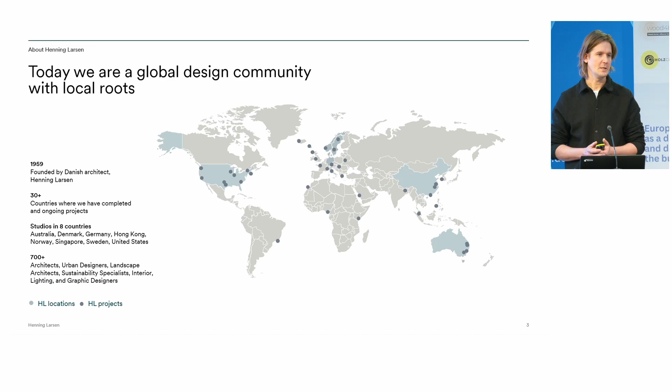Short introduction: Henning Larsen is a global design firm. We are around 700 architects based in Copenhagen, Denmark, but we also have design hubs across Europe, the US, and Australia.

We do a lot of different typologies. You can see a lot of green and brown colors here, because we are very fascinated by nature, but also by timber. I think 80% of what we do at the moment is timber building, timber square meters coming out of the office globally. So timber is a big part of what we do.

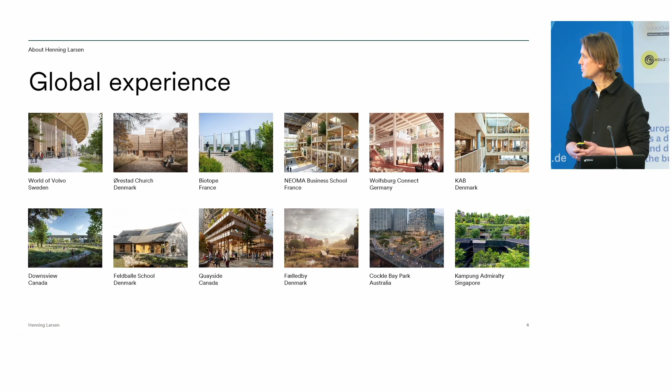In Sweden they call it allemansrätten, the right to nature, so you cannot own nature. Everyone is allowed to go camp, picnic, and shelter in the forest and in the landscape. So everyone can go up and have a look at the World of Volvo and go to the roof. And of course, Volvo is on a green transition, so it needs to be bio-based and timber.

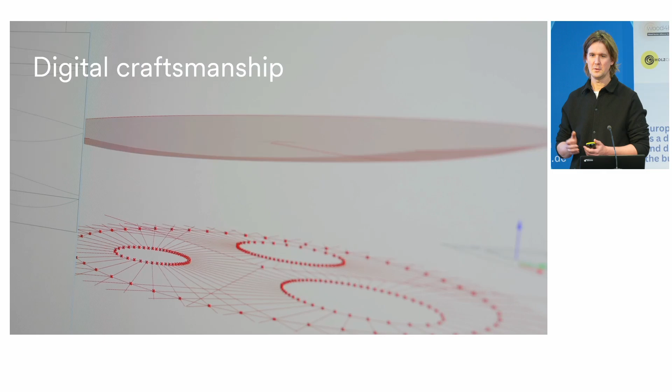As Katrina also showed, when you do those kinds of free-form shapes, you need digital tools to be able to perform and design with them. We have a computational design team that works very closely with our manufacturers. We see the timber industry is more proactive than the concrete industry - the concrete industry is just producing, while the timber industry wants to get into dialogue.

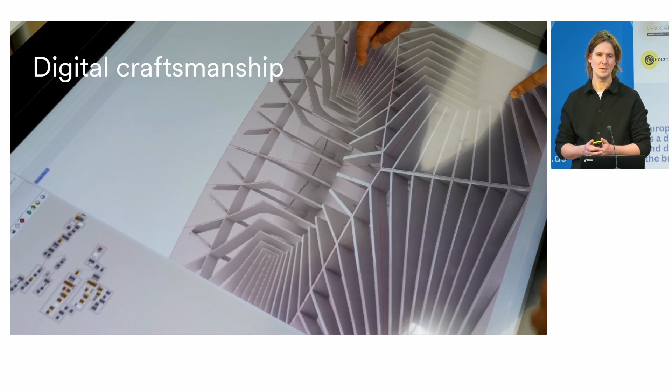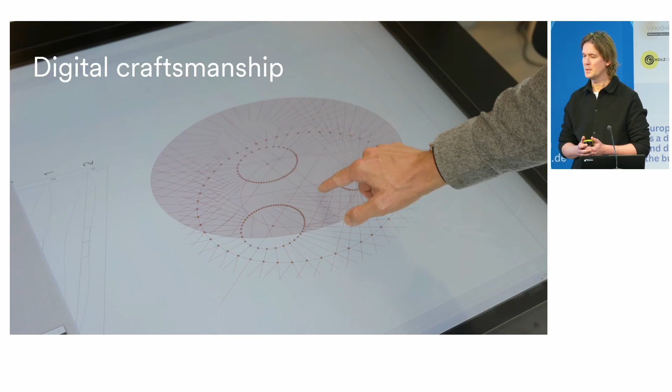This project was unfortunately not with Katrina, it was with WIEHAG in Austria, where we did an integrated design. We built in the manufacturing process and worked that together with the architecture. So when we changed the shape or diameters of the columns, it also changed the production phase. We understood the price impact of design changes and the manufacturing time. This workflow works very well together.

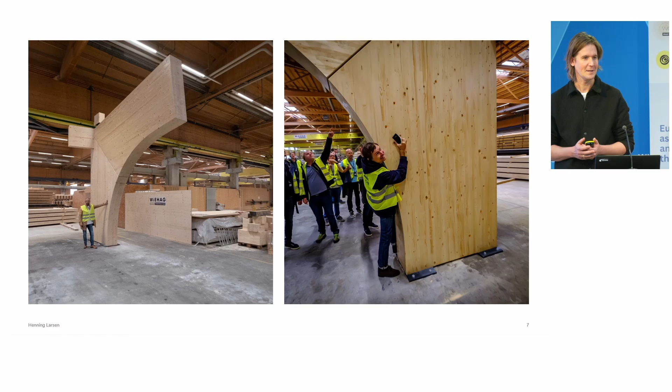This is Philip, one of our design leads. I have never seen a colleague of mine hugging a concrete beam, but Philip actually went there and hugged one of the big timber beams. I think there's something about it, something emotional - it's warm, it's soft, it also creates a smile. So everyone that works on timber buildings is also smiling. That's a great understanding of the value of working with timber.

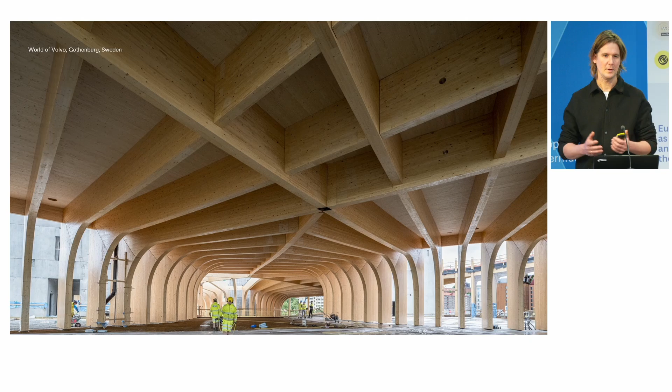This is just an image of the complexity. It's very huge, it's grand, and when you get into the building you see the timber - it's very much part of the architecture.

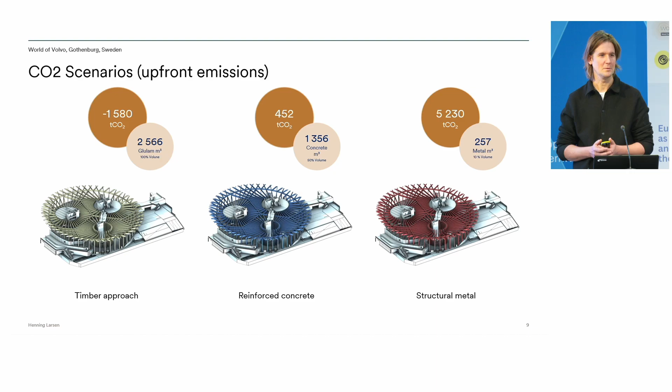Then, as Uwe mentioned, Fælledby is the first full timber city coming up just outside Copenhagen. It was inspired by Christiania - some of you have been to Christiania? It doesn't have a pusher street like that one, but we want the same atmosphere. It should have the variety of Christiania, something grown from the bottom up.

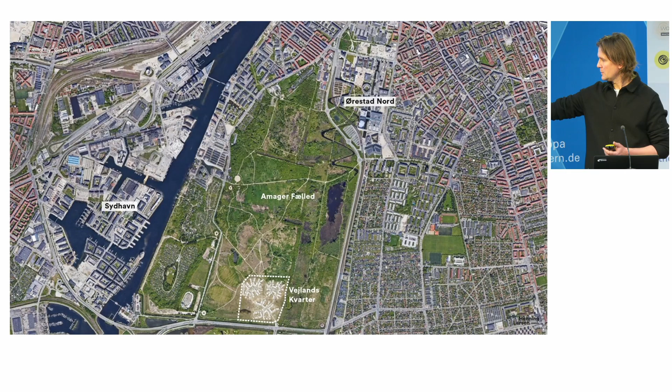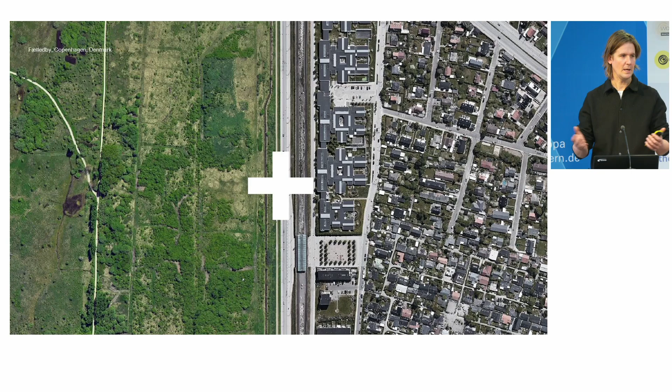It's not like something fully standardized, Le Corbusier style. But again, it's also modular design, so how do you combine modular design with variety in architecture? That was the big part of this project. It's just outside Copenhagen, on a landfill area. The whole idea was how do we combine nature with the built environment, how do we create a new kind of city that takes in nature but still provides residences for people.

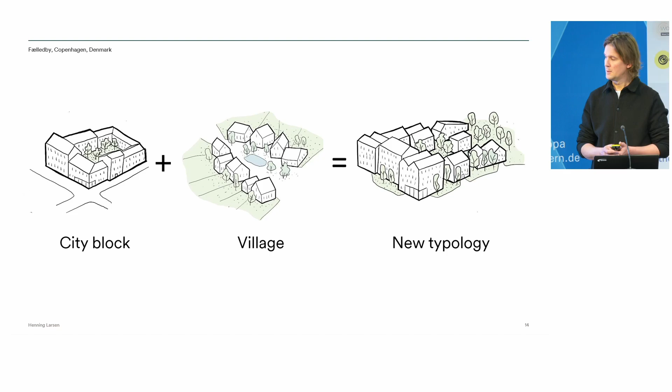We took a traditional city block that everyone knows, with the courtyard in the middle, and we were inspired by the old village. We created a new typology that combines an open courtyard block, so we get the intimacy of the courtyard, but we also open up to nature.

Instead of doing one big master plan, we created 3 villages. The contractor liked this because he could build one and then another, with residents moving in as each phase completed. Every one of the 3 villages has its own plaza in the center, which opens up to nature.

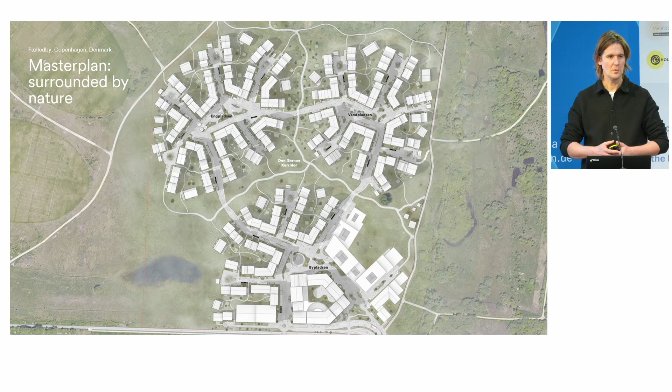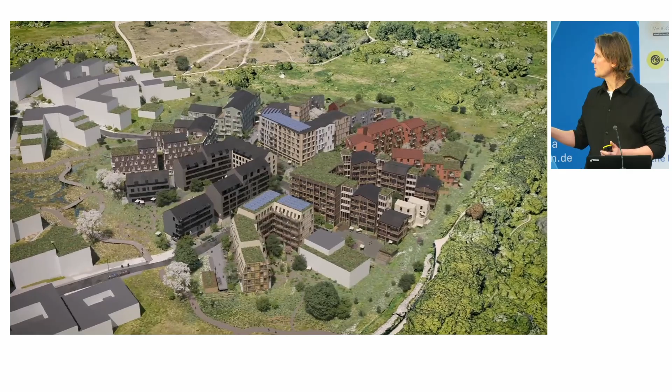Here you can see one of them in the design, where you have the courtyard, and then the new wing that opens up to nature and steps down toward it. All of this is in timber structures, some prefab elements and some built more on-site.

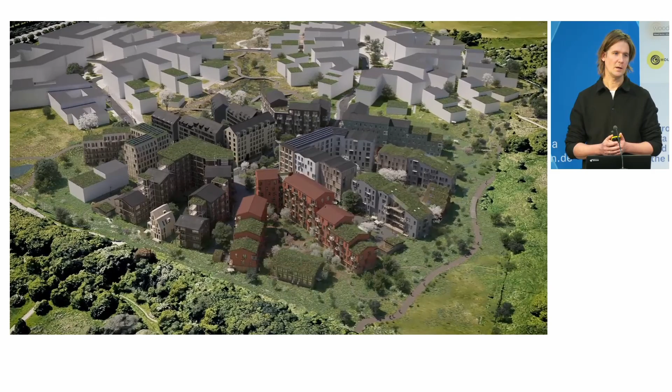We didn't design the whole master plan ourselves. We're designing a few houses within it, but we also opened it up for other architects to come in and create the variety and feeling of Christiania. It cannot be done by one architect.

So this is the imagination of the life we want to create in this village, a combination of local feeling but also a real connection to nature.

Some of the big barriers when designing with timber are making the insurance company rely on what you're doing. In Denmark, fire is a big focus area, and every small twist in the building requires a 1-to-1 scale fireproof test. So there's a lot of investment for the building owner in fire testing. We did around 50 different 1-to-1 scale fire tests of the facade.

This building is coming up now. It's a combination of wooden facade cladding and a straw element in the facade as an insulated element.

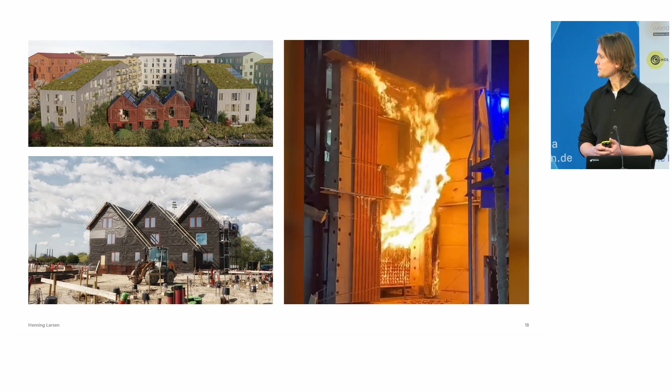We have this promise to residents that they all have a view of nature, and most of them have access to nature too. All of them have a balcony, but no pets or cats are allowed there. So that's like a negative.

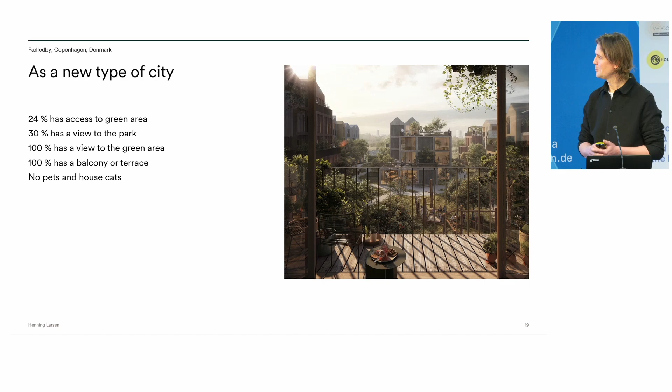It's important to understand that when you're doing something for nature, you also have to react to it. We know cats chase mice and small birds, and nature is part of this. We need to protect it. So when you move in here, you're not allowed to bring your house cat. But then again, you get this beautiful view instead.

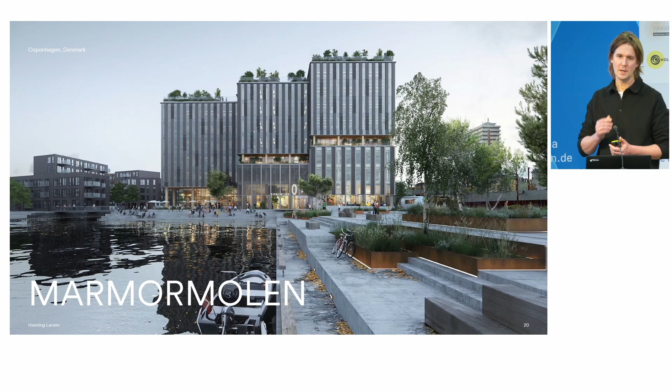Another project we are doing is called Marmormolen, the marble pier. It's the biggest timber structure coming up in Copenhagen, Denmark at the moment, around 25,000 square meters of glulam structure.

This is where we are now. But again, we need to understand there is a building code we need to fulfill, and the building code in Denmark is based on the concrete industry. We've been building with concrete for the last 80 years. So fire, vibration, and thermal mass are things we need to challenge.

So this is also a hybrid structure. We have concrete cores, mostly because of fire safety, and a lot of concrete below ground. What we see in Denmark at the moment is that it's difficult to build basements with the new CO2 regulation, because it's hard to bring timber underground due to humidity. So the whole infrastructure is changing in Copenhagen.

This is part of the Nordhavn project, an urban harborfront project. There's no below-ground parking, it's all above ground, because of the CO2 considerations.

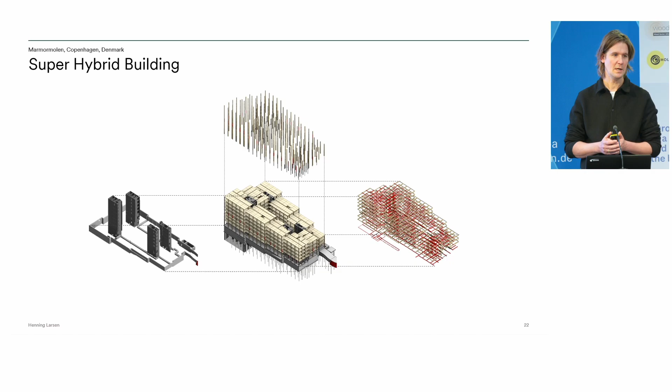There's also the floor-to-ceiling height to consider, since timber beams are bigger than steel beams. So here we also combine techniques, creating hat profiles in steel to route the ductwork around. There's a different combination of concrete, steel, and timber together.

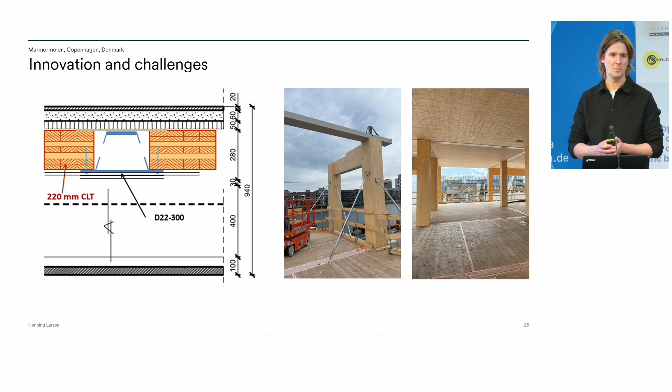I think it's also about getting the best out of the different materials. It's not only about being religious and working with timber, we also need to understand the technique of different materials. One big part of it is that timber takes up more space than a steel beam will.

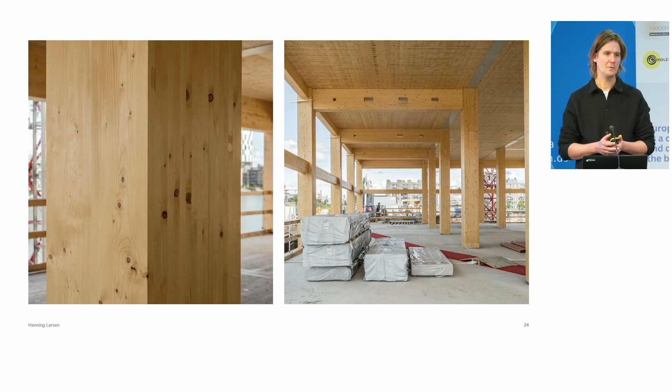The first thing we did for this office building was consider the client's concern for efficiency. The size of the beam coming down is like a fridge, something like this. It's beautiful and huge, but it also takes up space.

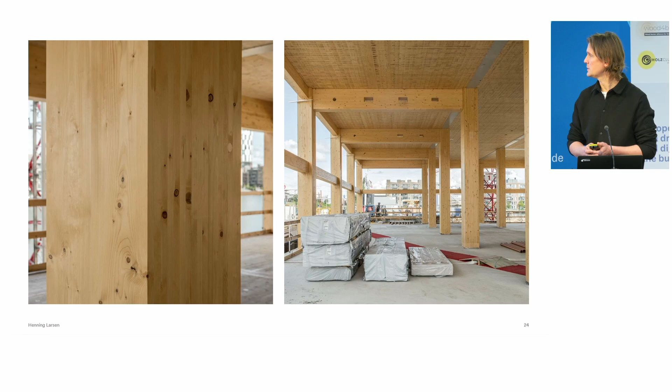So the first thing we did was the space plan before actually doing the structural system, to understand how we get the people we need into the building and how we achieve efficiency. Then we laid out the beams after doing the space layout.

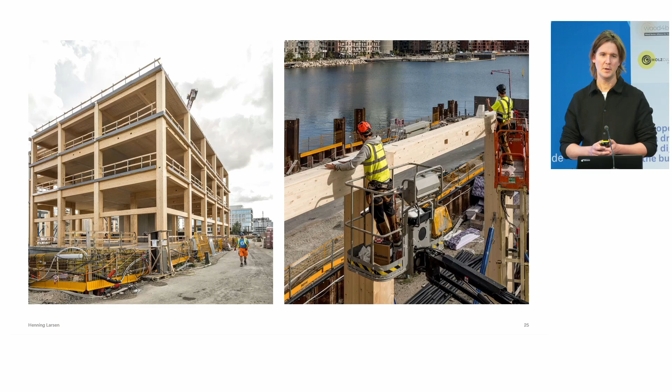The EU taxonomy is really kicking in. We see it from the global and big investors and contractors we have. Now it's not only nice to have, it's also a need to have for the investment. And we see this across Europe, but also investment across Australia and also US. So that is really positive.

In Denmark, we are the first country in EU to have strict regulation on CO2. You are not allowed to get a building permit if you don't document your life cycle assessment. This came out last year, and this is the new regulation that comes out in January next year. And that states for different typologies that you need to be below 7.5 for multi-story residential and office buildings. And that's for the whole life cycle of the building. And we also know where to go in '27 and '29.

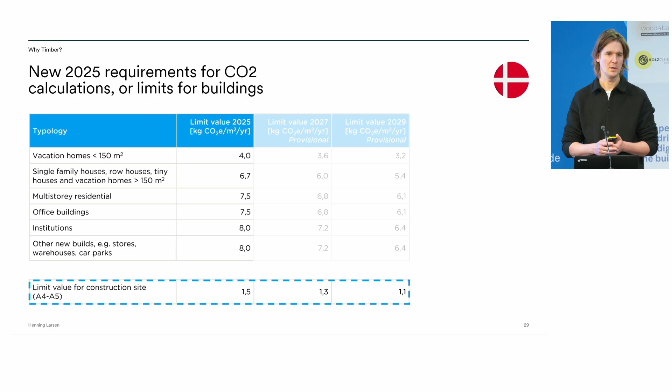So that's pushing very much the industry to fulfill that standard. It's not a nice to have, it's a need to have, otherwise you cannot get the building permit in Denmark if you don't document it. And then they also put in the limitation on the building site, that is like the A4 and A5 phases, that is the energy or fuel consumption on the building site and the materials transporting to the building site. So now if you're shipping your materials from China, it will affect the CO2 and it can be limited within the standard.

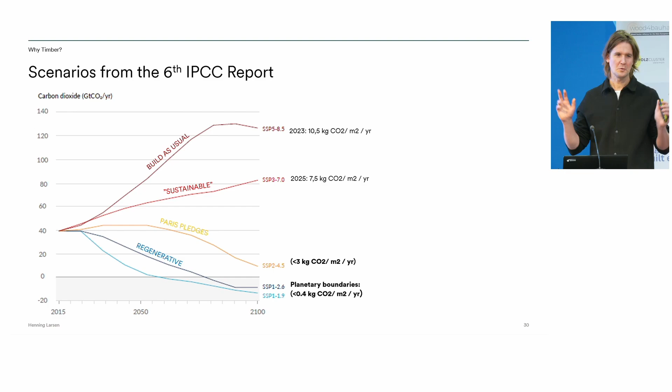But is that good enough? Are we good enough? What we see is that now there's a standard of 10.5 kilogram CO2 per square meter per year. It's very much built as usual. We can do concrete building on that scale. When we start the new standard, we can start to call it sustainable. It's not really sustainable. It's not regenerative.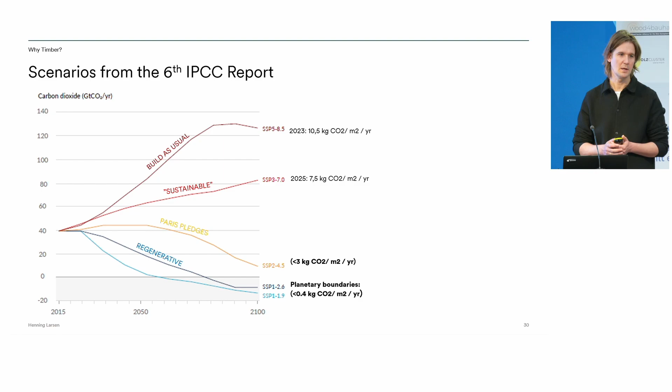But if we need to fulfill the Paris Agreement, we need to be below 3 kilograms, and even though we need to be within the planetary boundary, we need to be below 0.4 kilograms of CO2. So there's a long way to go there to actually be sustainable and be regenerative in our design.

Maybe a lot of you will also hear this today about the life cycle assessment. There's a European standard for how you calculate it. Countries have different phases into design, and some of them have different lifespan of the buildings.

This is the upfront emission. That is very much what we are focusing on at the moment, because that is the here and now emission. But we also need to take in the operational energy and the replacement. Operational energy have been a big focus for many years. It's still the case in many countries where we have a black grid. In Denmark, the grid is almost 100% green. So when we do a life cycle assessment, it's only 10% that is within the operational carbon. 90% is in the embodied carbon.

So that is also why there's so big focus on the timber and concrete. And when the grid is turning more and more green, when we turn away from the Russian gas, we will see much more focus on the embodied carbon and not so much on the operational.

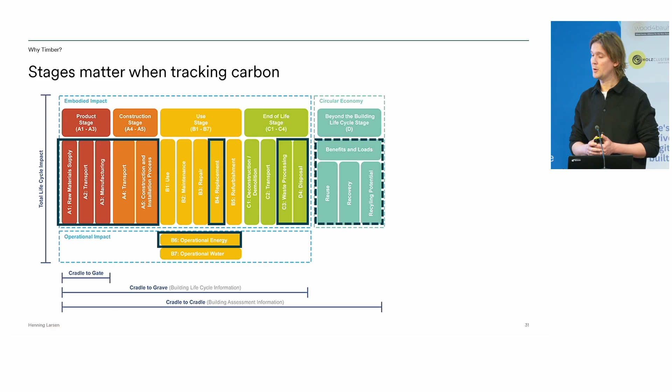But then you, of course, also have the end of life scenario. In a building, in the methodology, it's like having a life of 50 years. And then you can calculate in the beyond life if you have agreement and take-back strategies.

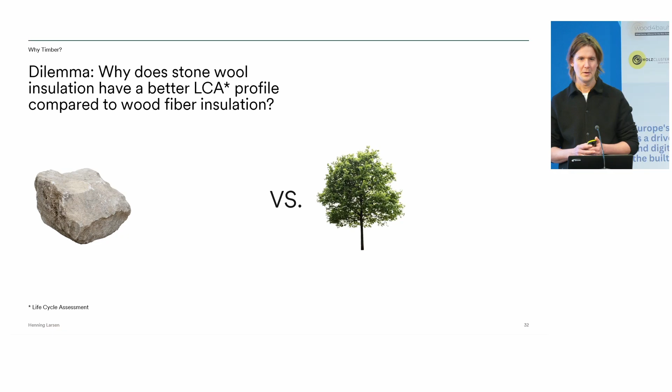But there is also a dilemma. We see a lot of EPDs that actually, when you combine a stone and a wood, a timber, and you manufacture it to like a stone wool batt or wood fiber insulation, often the stone wool batt will perform better than the wooden insulation or the wood fiber insulation. And why is that? That seems very unlogical, because we all know that timber is good.

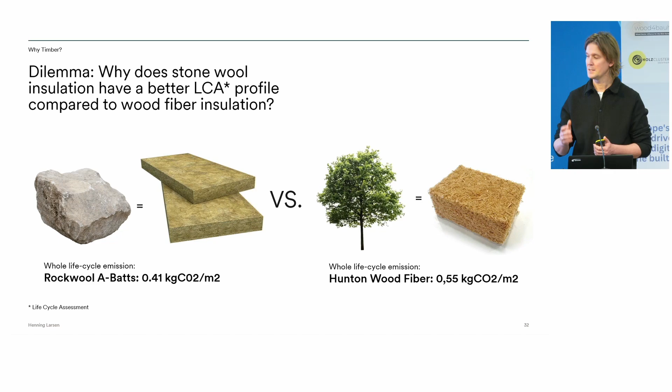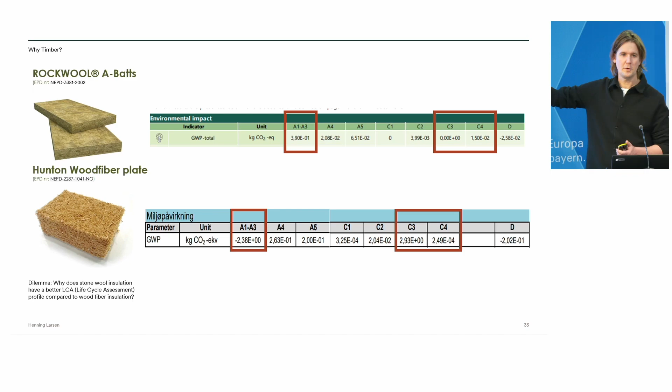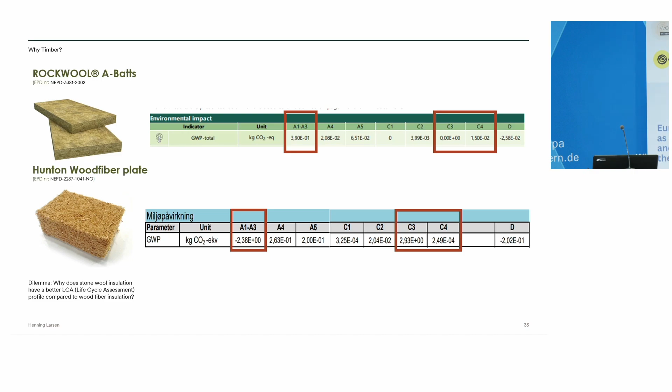It's because we're calculating the whole life cycle of the materials. So the rock or the stone wool insulation have a high upfront emission, but it actually has a very low end of life scenario because it's kind of disappearing. If you have the wood fiber, it has a negative upfront emission, but the carbon is also released again after the life cycle because it's like burned or fired up in the methodology. So that we need to take into account and understand.

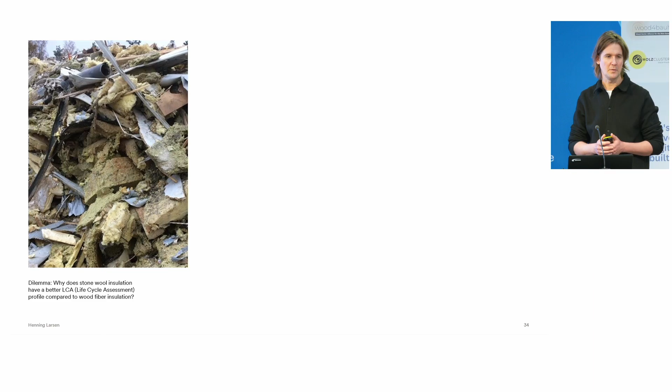And it's also something we need to challenge as an industry. If you talk with the producers of the stone wool batt, this is often what will happen: then it will be disposed of, it will go into landfills, and then it disappears. It's like the rabbit and the magician.

We don't need a rabbit in a hat in the climate changes. We need real facts and real data. I think we need to understand the methodology, but we also need to challenge the methodology. Why do we need to do that? Because we have this critical window. If we need to fulfill the Paris Agreement, we have 10 years to act. We cannot wait 50 years for end-of-life scenarios. We need to account for what we do today. That's also why bio-based materials are so good.

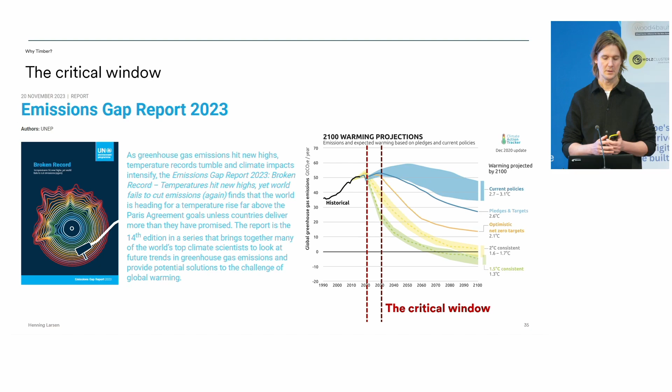I was happy to see that pyramid. This pyramid was actually invented by Henning Larsen, one of our researchers, and it was basically a copy-paste of the food pyramid. I think everyone knows the food pyramid - learning from school, you should have the carrot and the cucumber, and leave the red beef and the candy to the top. It's not to say we all need to be vegan, or that Friday evening we can't have a glass of red wine and a beef, but it's just saying the hierarchy. It's the same as what the pyramids are saying.

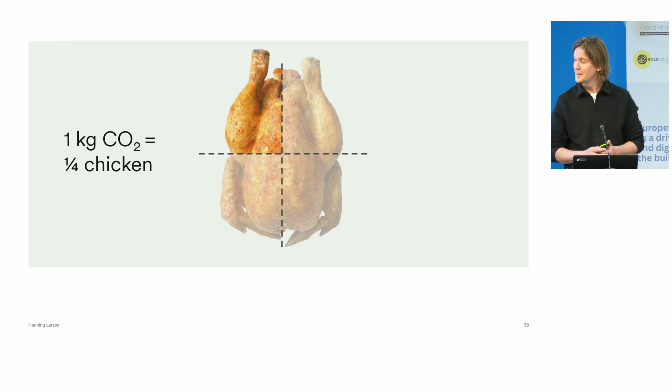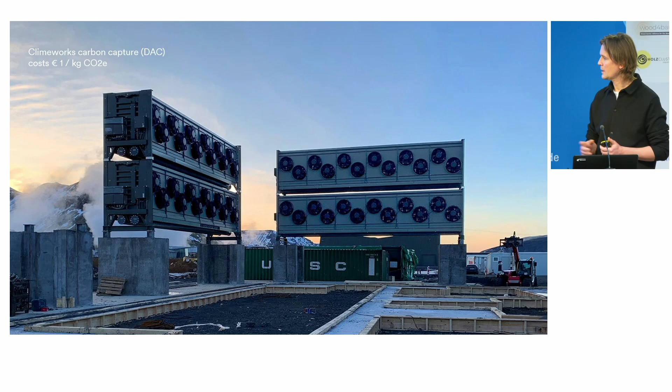But there's also a lot of talk about technology. Can we capture carbon? Yes, we can capture - this is the first plant coming up in Iceland, but is this realistic? It costs €1 to capture 1 kilogram of carbon. So imagine how much it costs to capture the carbon of an aluminium window, and then look at Brussels - how much will it cost to capture the CO2 from Brussels? It will be quite a huge investment.

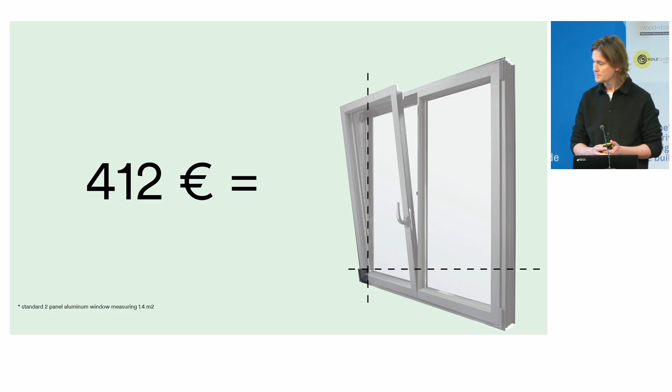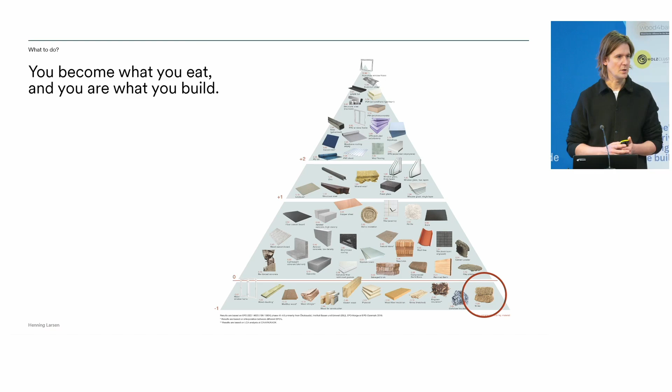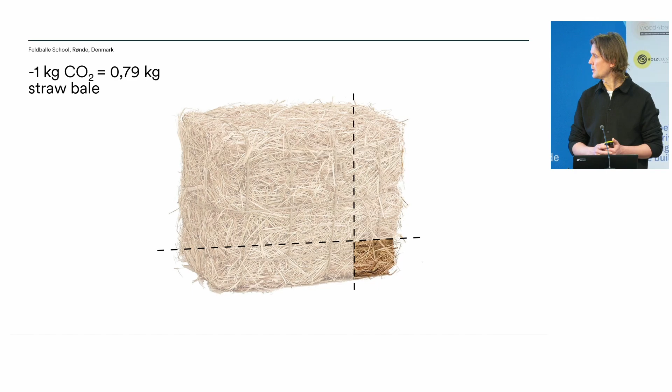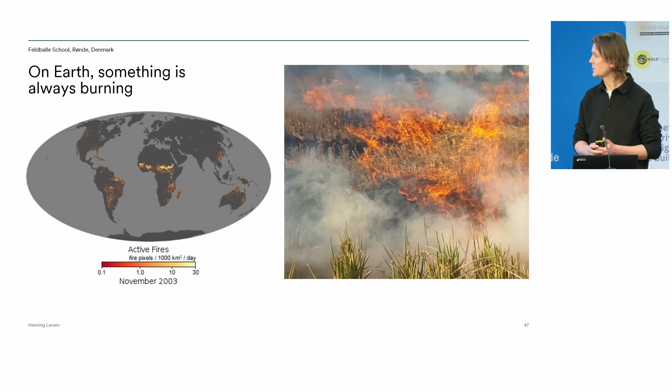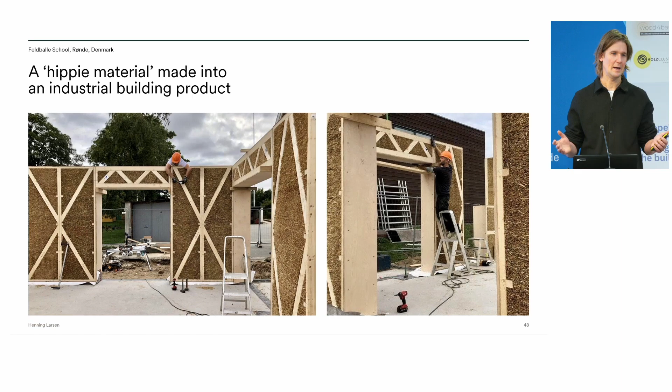But imagine if you can bring that back into the building industry. That's what we did here with this building, like Lego blocks. All Danes know how to build a straw building. This is actually Magnus and Peters, one of our architects, who went to the building site with the constructor, understood it, and built the building together.

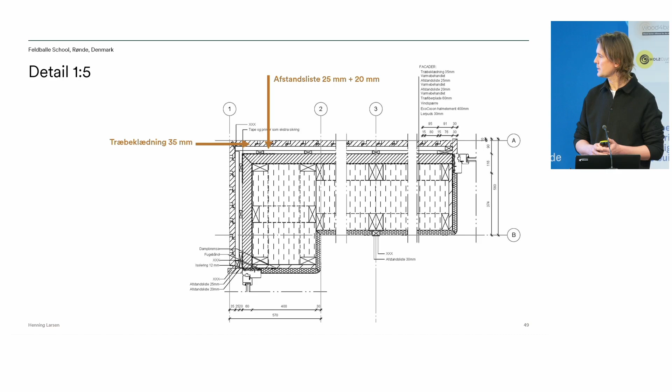This is the build-up - unfortunately this is in Danish, but there's some wooden cladding on the outside, then a ventilated cavity, then the wood fiber sheet. Then we have what you call the wind barrier to secure against infiltration, and then the straw element. Of course, the straw element is a bit thicker than the normal element - about 400 millimeters.

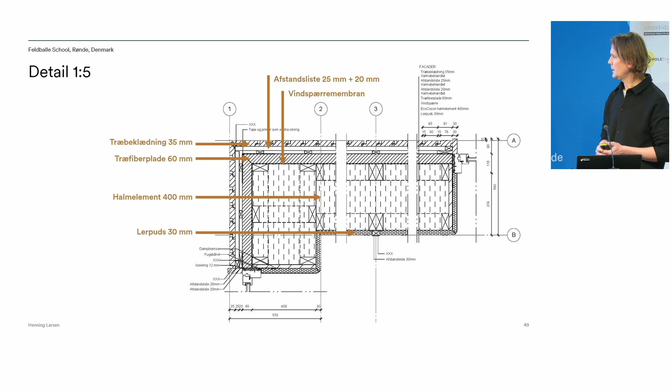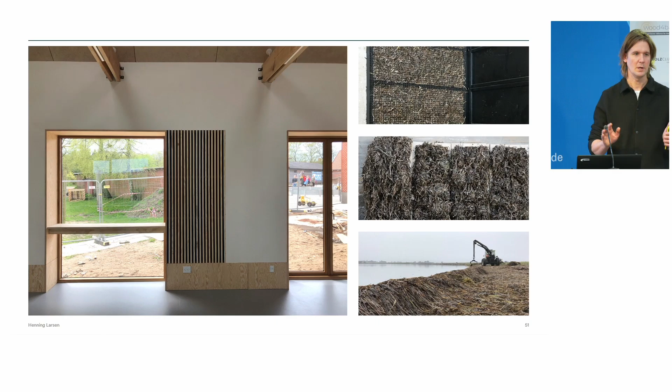And then we have clay plaster on the inside. This is how it looks like today. There's no ductwork in this building - it's purely naturally ventilated. We have lamellas, like a window that opens and closes according to the CO2 content in the room. Instead of putting in a mechanical filter, we have an eelgrass filter, just purely eelgrass that absorbs the heavy particles and the sound coming from outside.

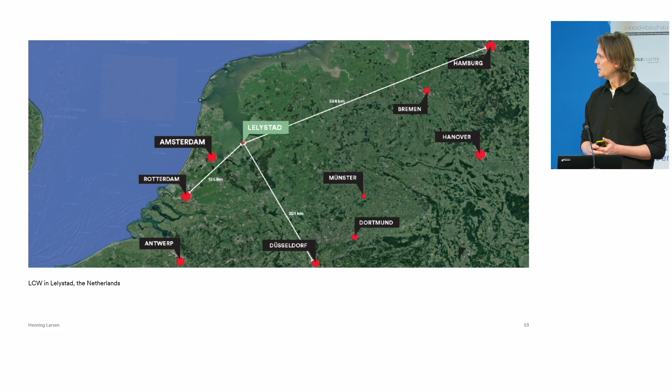The last project I want to show is the scale - we did this small school for 200 square meters, then thought the next project must be much bigger. We went from 200 to 200,000 square meters using the same technology. This is the Bestseller center, a logistics center in Holland, in the planning phase, in Lelystad. Here you can see it - there's some logistics and some office building to it. It's also a combination of CLT structures and straw element facades.

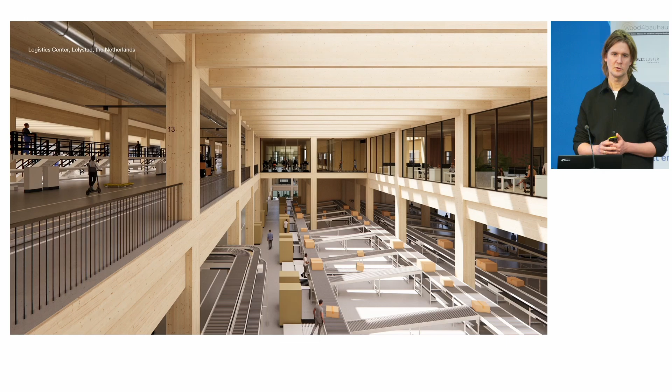We did a lot - again, it was very much driven by the client. The client is Bestseller, and they also needed to improve their value chains and scope 3 reporting. That was also part of the whole ESG strategy, to see how far we could go with the reduction of carbon emissions in this structure. Now we are around 36% reduction, but we even need to go beyond that.

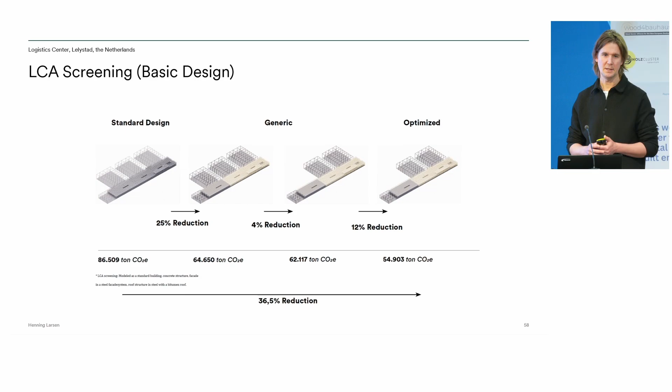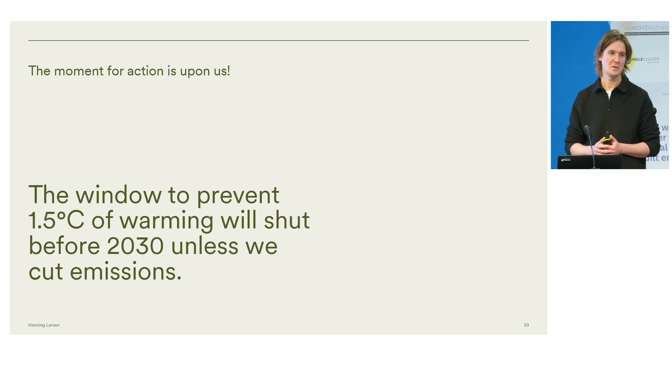So wrapping up, the window to prevent 1.5 degrees is shutting down, and I agree with Uwe - maybe it's already shut down, maybe we need to look to 2 and 2.5 degrees. But definitely, using biogenic and timber materials is the key factor for the upfront reduction, the here and now reduction. Thank you.